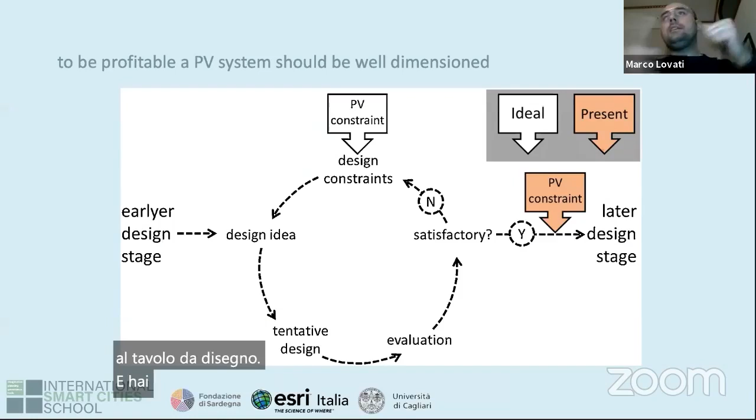So a few years ago, when I started my PhD in our company, we noticed that there is a problem in the way to design a photovoltaic system. Here you can see the typical architectural workflow that goes from an earlier design stage to a later design stage, and then there is an iteration. So you have a design idea, you try to design it, you evaluate, and if it's not satisfactory, you go back to the drawing board and you put all the constraints that you have, like the need for windows, the need for the structure to resist, etc.

So you can see that we would like to have the PV constraints alongside all the other functions of the building, while unfortunately in our practice, we always had it later. Next slide.

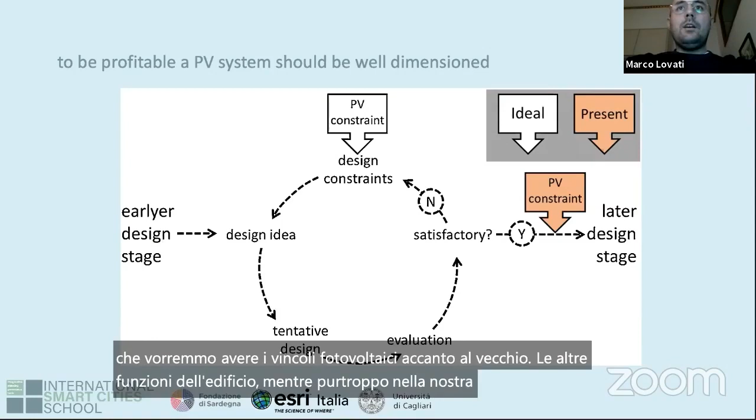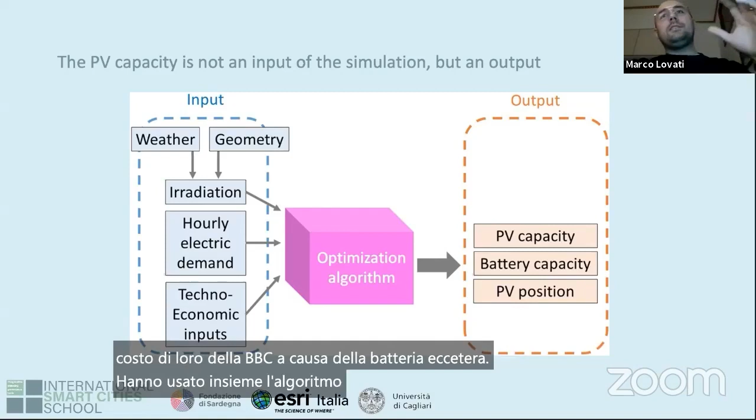So we decided to create an optimization algorithm that, given a weather file, for example an EnergyPlus EPW weather file, and the geometry of the building, can create the irradiation. Then the irradiation, together with the hourly electric demand of the building and a series of techno-economic inputs such as the cost of the PV system, the cost of the battery, etc., all go into an optimization algorithm that suggests the correct PV capacity, the correct battery capacity, so the storage, and also the positions of the PV system. Next slide.

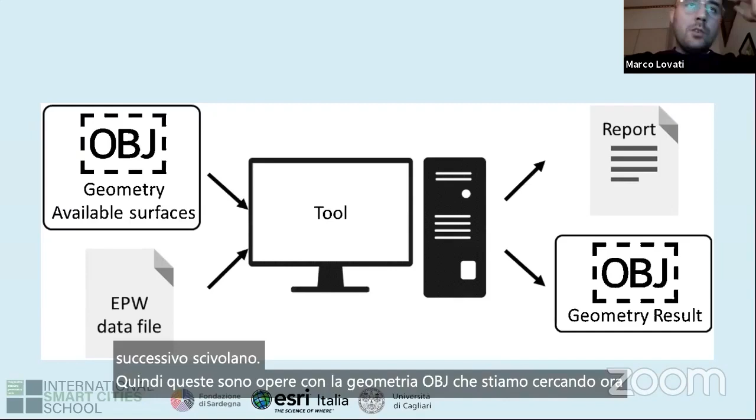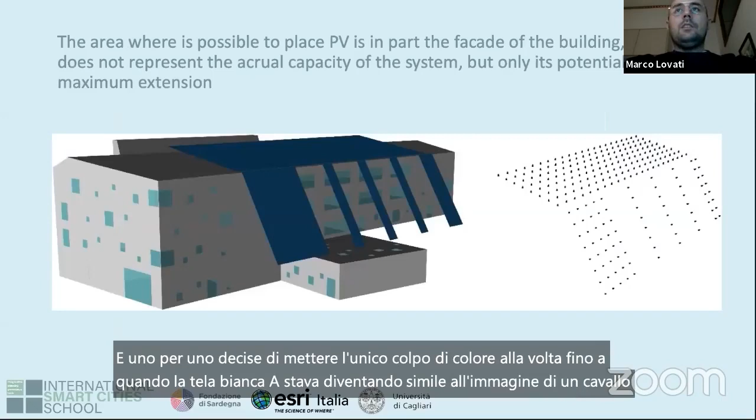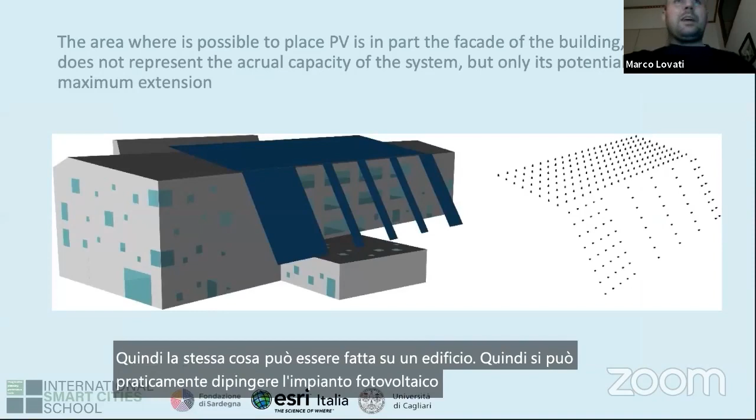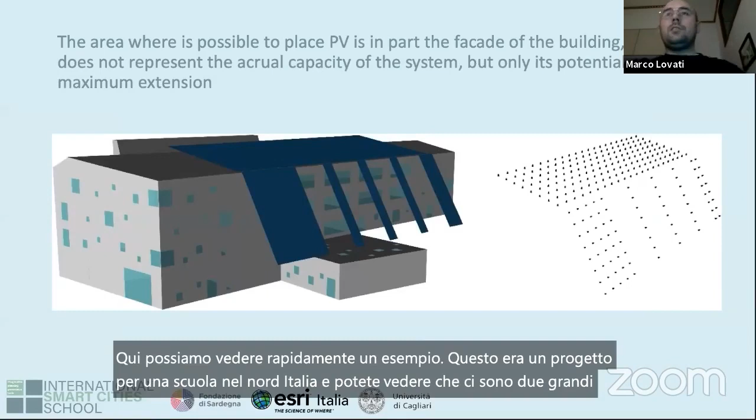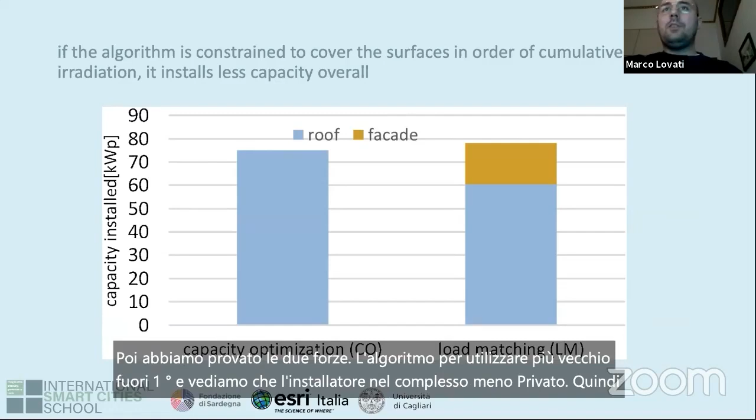But the surprising thing is that there is gain at all, because if you ask most of the PV experts, nobody will ever suggest you to put part of the system on the facade, but sometimes they might be wrong. I mean, even if you don't have a real gain, because it's a very small gain, at least you have the freedom to put part of the system on the facade, which is interesting, at least for the look of the building. But even more important, you can substitute some cladding material with PV and so on.

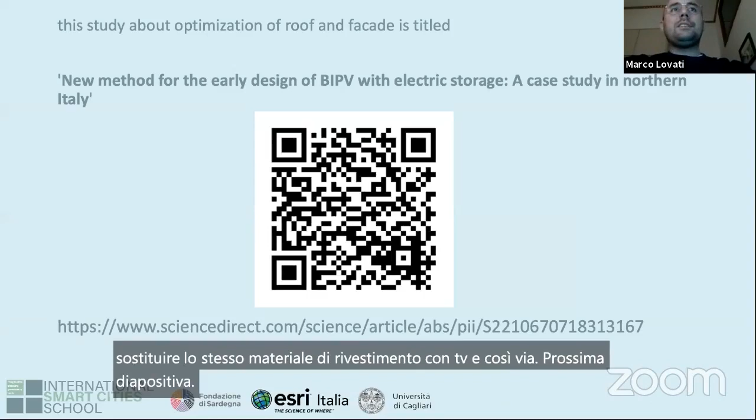So if PV in self-consumption is already profitable, why do we need energy communities? If somebody is skeptical, they will think so. So of course, a well-designed, well-sized PV system is profitable with today's prices of PV and electricity. But the problem is that most of the cost is upfront. So in the beginning of the investment, you have to pay a lot, and then the maintenance is very cheap.

So to change a couple of modules or to change the inverter over 30 years, or to clean the modules every year or every couple of years, is not really expensive. The biggest expense is the beginning. So this means that even though you have an interesting internal rate of return, the payback time is quite long.

Furthermore, the aggregation has many benefits, and we can see why in a quantitative way. So here was a very theoretical study.

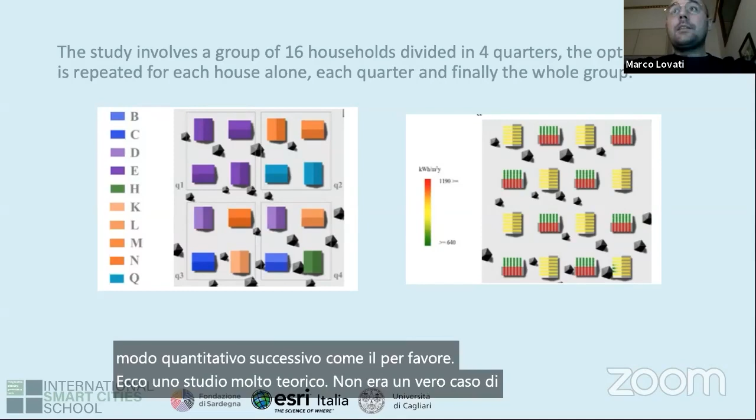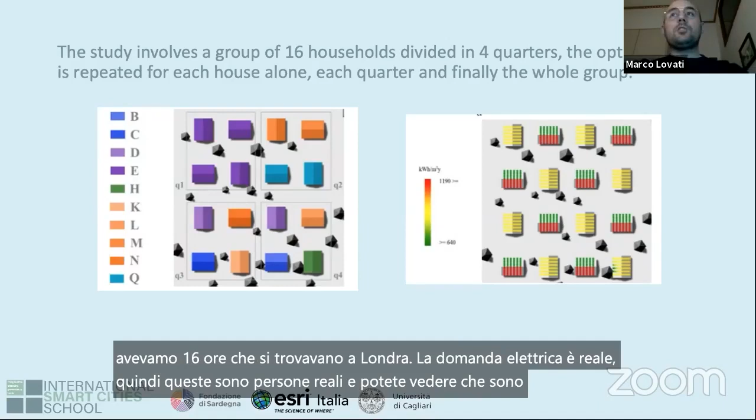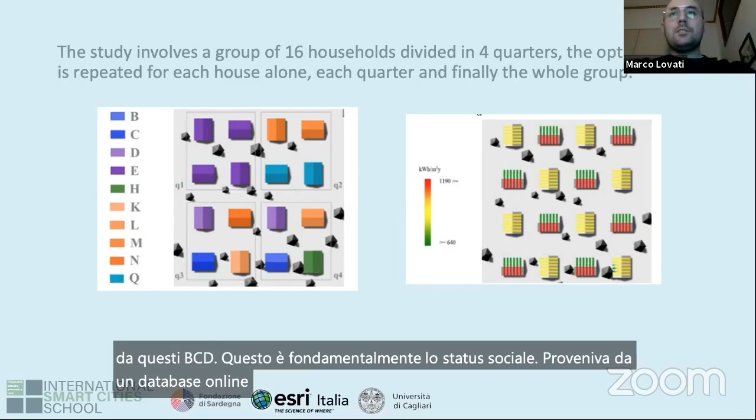It was not a real case study, but here we had 16 households located in London. The electric demand is real, so these are real people. You can see that they are characterized with this B, C, D. This is basically the social status. It came from an online database, classified by the Acorn classification system. And then you can see on the right the same 16 houses.

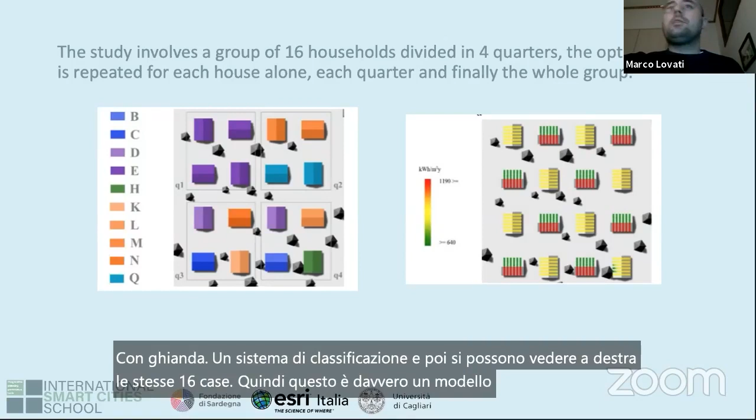This is really a simplified, completely theoretical model. But you can see the irradiation over the different slopes of the roof in this system.

So we tried to optimize first every house individually, and then we tried to aggregate the houses, so to make microgrids. As you can see, if you want to get the optimal net present value, the single houses have an average optimal capacity of half a kilowatt per house. The quarters, so 4 houses in every quarter, it's a little bit higher. And if you make a microgrid with all 16 together, it's still a little bit better. So basically the aggregation favors a higher integration of PV system, very high, more than 100% more.

And here you can see from the top, of course, if you optimize each house singularly, each of them will install 1 or 2 modules.

Then if you use the quarters, already you have a gain, because in this case in London, it doesn't pay to use the east and west facade due to the demand shape and due to the irradiation, which is quite low. So you don't have problems of overproduction, you only want to maximize the irradiation. So if you let the algorithm use the microgrid, you'll see it will use only the south slopes. And even so, there is still a gain aggregating all 16 houses. So it installs a little bit more, as you can see from the picture.

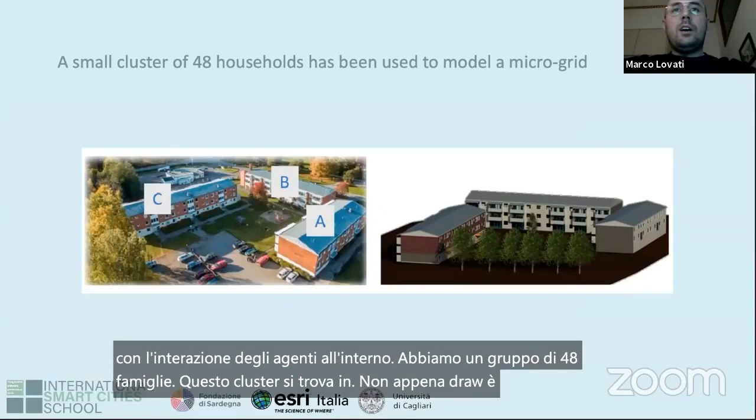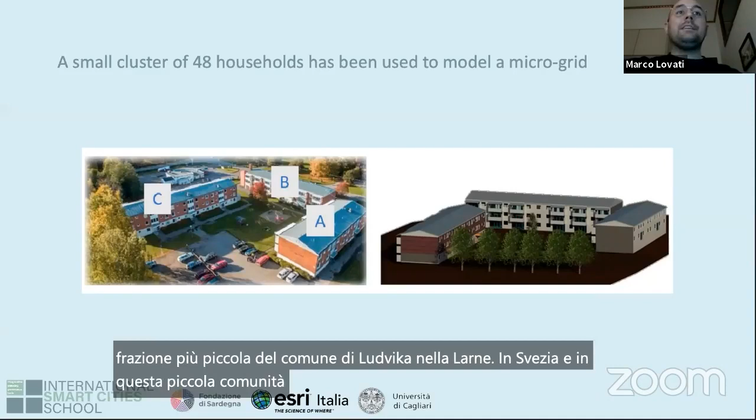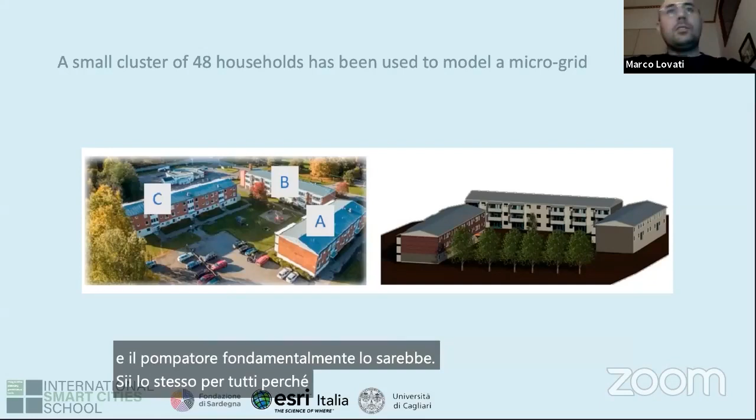It's a small fraction of the municipality of Ludvika in Dalarna, Sweden. This small community is now undergoing energy retrofit. They are installing a microgrid PV system on the roof and on the facade, and also a new heat pump, which in this study we didn't consider the consumption of, because we only wanted to focus on the households, and the heat pump would basically be the same for everybody since it's a centralized load. So it was not so interesting and we ignored it, but it will be there.

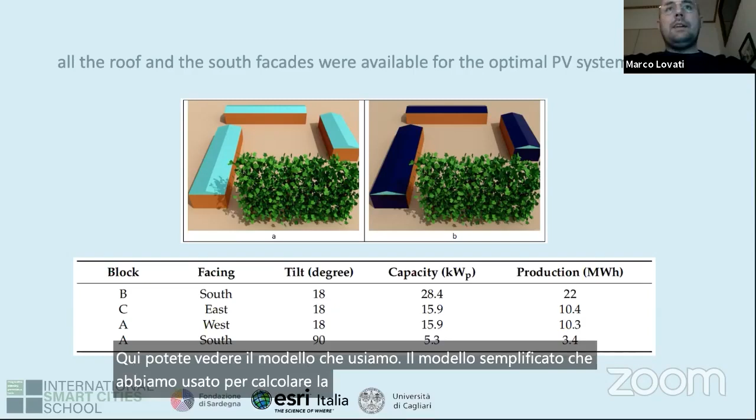Here you can see the simplified model we used to calculate the irradiation over the surface. On picture B, you can see all the areas that were made available for the PV.

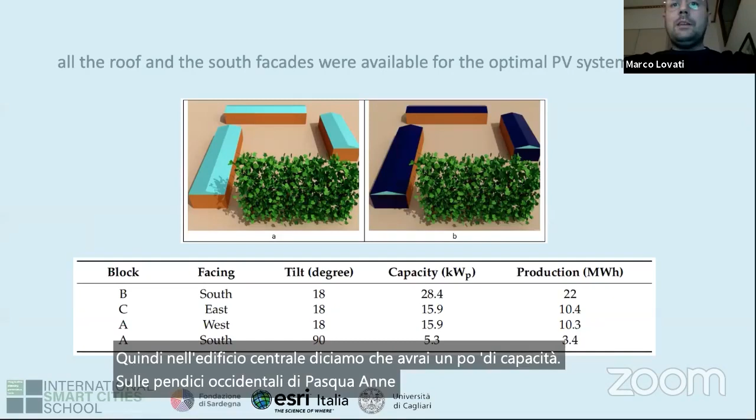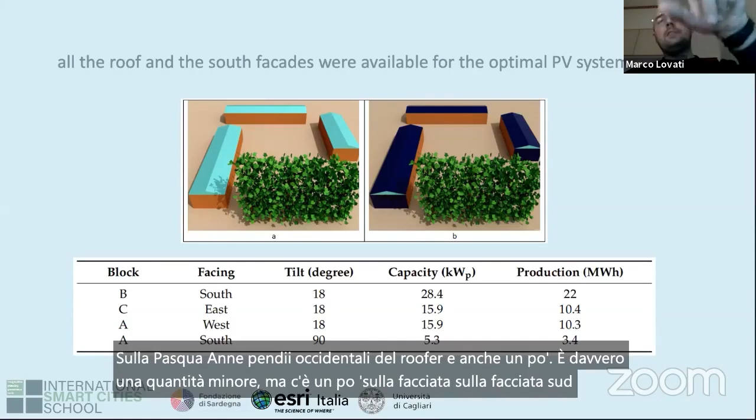In the table below, you can see how the optimization algorithm decided to place the PV system. You will have most of it, almost 30 kilowatts, on the south slope, in the central building, let's say. Then a little bit of capacity on the east and west slopes of the roof, and also a minor quantity on the south facade - actually part of the facade of the shortest building, because it has less shadow from the tree in the south.

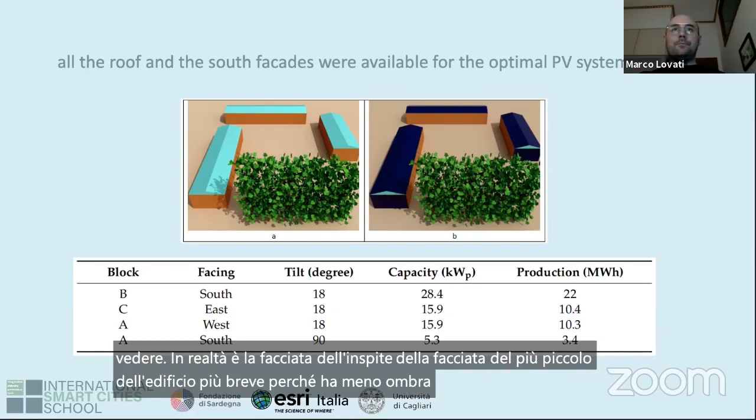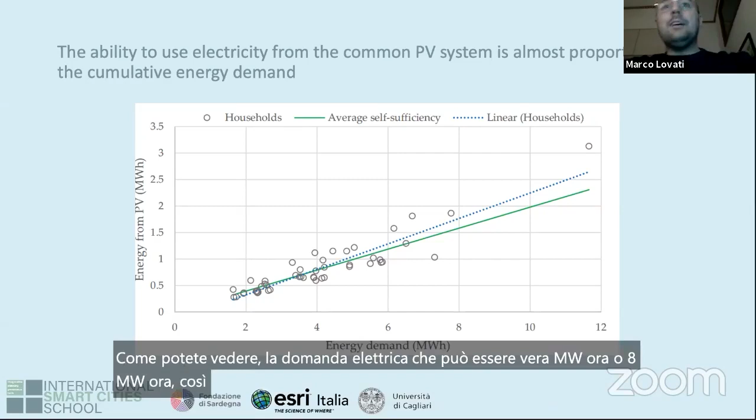But you can see basically that it's almost a linear correlation, so the more your cumulative demand, the more the energy you get from the PV. And this is sadly because even though the self-sufficiency can be 14 or 28%, so one double than the other, as you can see, the electric demand can be 2 megawatt hour or 8 megawatt hour, so it can be 4 times as high. So basically the self-sufficiency only becomes a noise in the capacity to use electricity from the PV system.

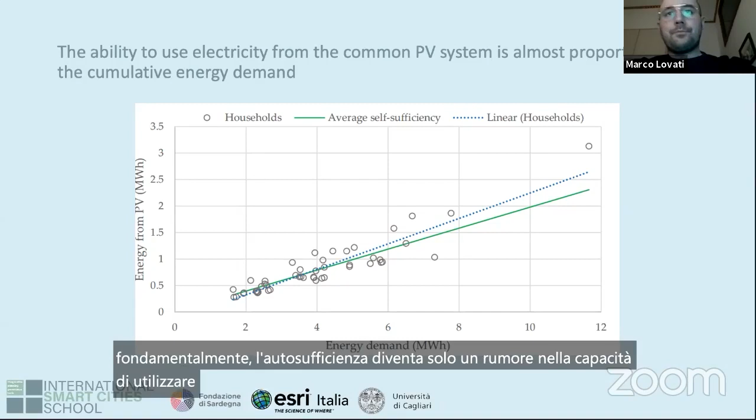And this could be corrected. So we can, for example, put the rule that the households that consume the least electricity are prioritized, so they get priority over the local electricity. Next slide, please.

So we can see first of all a case of the local energy community where the electricity is given for free. What it means, of course, is not free. If there is a community, it means that everybody buys a share of the PV system. So we build the optimal PV system, but each single household pays a little bit in the beginning. And then every year, of course, there are costs for the maintenance, for changing the inverter, etc.

But of course, when there is electricity, the electricity is free. So if the electricity is more than the electric demand, in that hour you pay zero. It's completely free for you because you are a shareholder of the community. Of course, if the demand of the community is too high, we have to buy a little bit of electricity from the grid, and so we pay for that much. So for example, if we can cover 80% of our demand and the other 20% we have to pay, we only pay 20% of the price of the electricity that we buy.

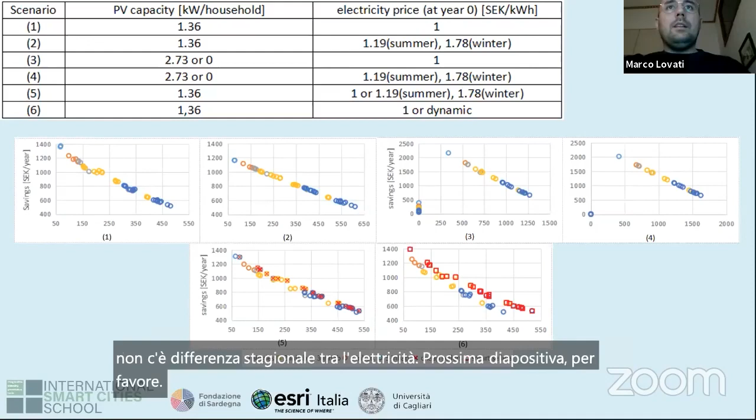So here we can see the revenues and the savings. All the axes are in crowns per year. You can see, for example, the difference between case 1 and case 2. You can see that in case 2, the electricity is more expensive, and so it's like a line. So the less you have as savings, the more you have as revenue, because it's basically the same.

There are still some differences left. It's a bit complicated. We don't have much time. I would love to go into detail if somebody is interested.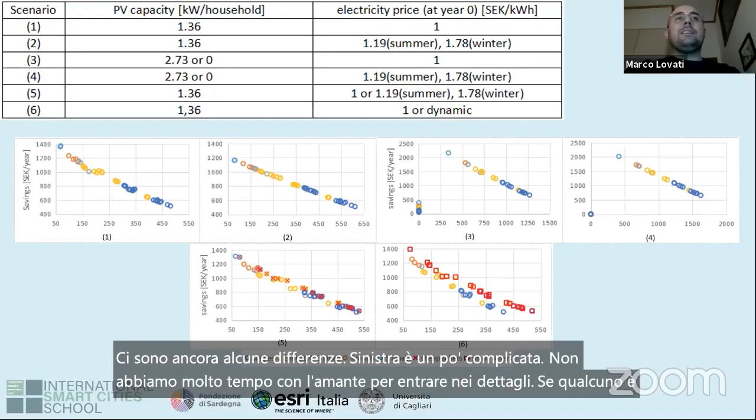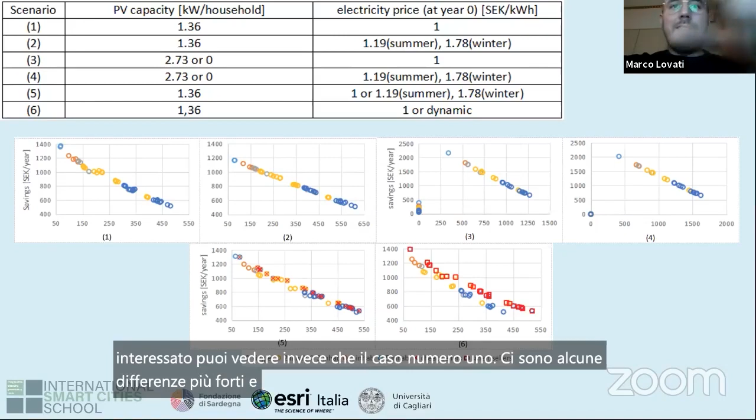You can see instead that in case number 1, there are some stronger differences, especially the houses that are consuming more. You cannot see the legend because of the subtitles, but those blue ones at 1400 crowns savings, those are the very large households with 5 people inside. You can see that they have higher savings compared to the others.

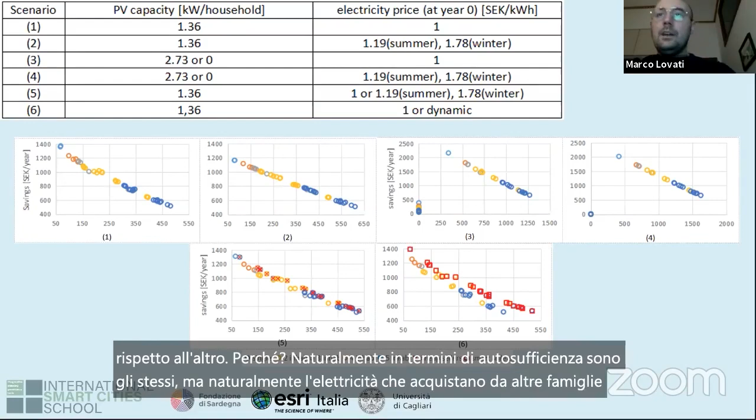Why? Of course, in terms of self-sufficiency, they are the same. But of course, the electricity that they buy from other households is cheaper, so they have a larger gain. Then we can see that 3 and 4 basically are similar to 1 and 2, but you can see that in the bottom left corner, there are some groups of households.

In truth, I tell you, those are those who didn't want to buy the PV system. So of course, they don't have revenues because they don't own the system. But if the electricity is cheap, so in case 3, they can have a little bit of savings, much less than the others because they only consume the excess electricity.

So you can see also that if you do buy your share of the PV system, both your savings and your revenues are much, much higher than what they are if everybody does. So if you have a larger share, your earnings are higher. This is also an interesting phenomenon. I'm writing this paper right now. I would love again to go into detail, but it's not possible.

Then we see case 5 and case 6. Here we have different strategies. In case 5, part of the households sell at a high price and part at a low price. The ones with the red X are the low price sellers, so-called cheap sellers, again below the subtitles. So you can see that the cheap sellers in general earn more.

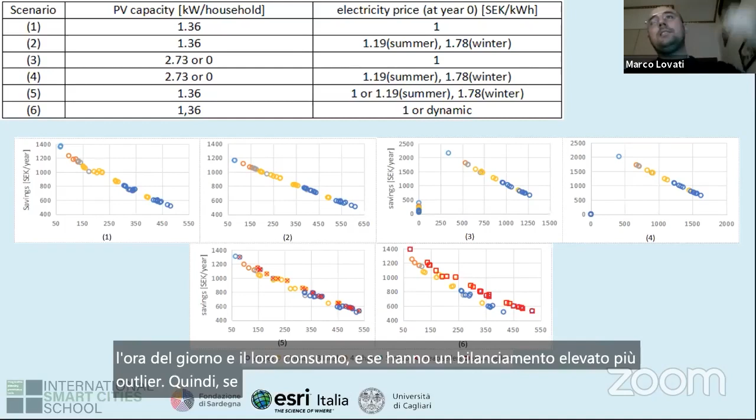And then you have case 6, a very simple strategy, a very simple dynamic pricing, but in this paper we call them smart sellers because they have a little bit of intelligence. So basically they look at the hour of the day and their consumption, and if they have an outlier high balance, so if they have too much electricity, they assume that everybody has electricity, and so they decide to sell at levelized cost of electricity.

This strategy is very simple, and it's also very flawed because it could be that you have a lot of electricity in that hour, but it's not common. Maybe the electricity is scarce, so you are selling it for cheap in a moment in which you could sell it for expensive, and the other way around. Maybe you have an outlier low consumption in a specific hour. So it's actually a stupid strategy.

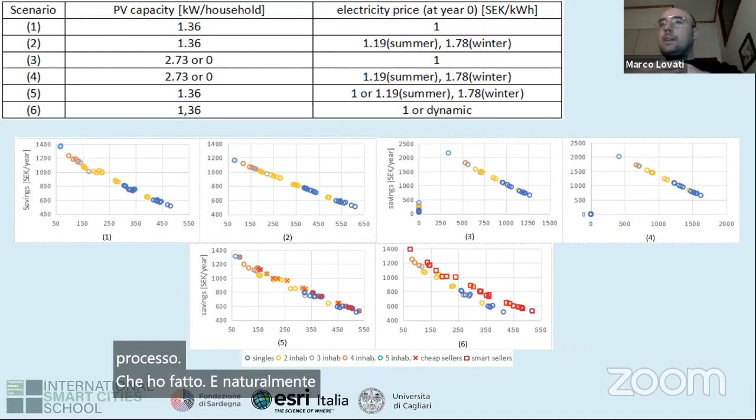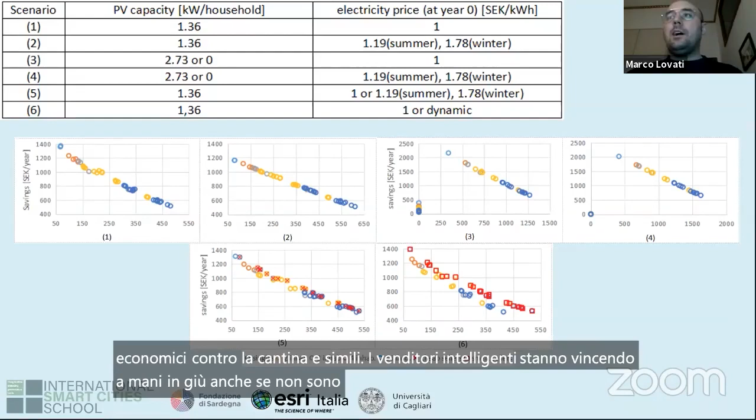It's not well designed, but it was just the first trial that I made. And of course, it was super effective. So you have the cheap sellers against the smart sellers, and the smart sellers are winning hands down. Even though they are not smart, they could be way smarter, but this is just an indication that if there will be energy markets in the future, there is obviously a strong need for a selling price scheme, a dynamic and clever price scheme. It's like a service sector. Next slide.